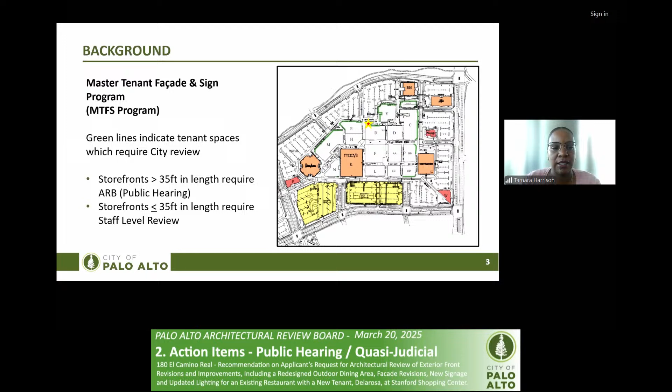The project is located within the Stanford Shopping Center off of Sand Hill Road, and it seeks to change the existing facade to accommodate a new tenant restaurant, Delarosa, and also proposes new signage for the restaurant. The project won't change the floor area ratio of the shopping center or the lot coverage, nor does it propose to change the use of the tenant space, but it will update the facade improvements.

Improvements include cleaning and repairing the existing roof screen, patching, prepping, and painting existing stucco, use of new perforated metal panels, and illuminated signage. There will be metal cladding on an existing awning, on a new awning with a wood underside, and blade signs. There will be new wall tiles and base tiles. The entry doors will receive a new wood treatment, and also some new wall sconce lighting. The facade has been determined to be consistent with the master program and with the center's character.

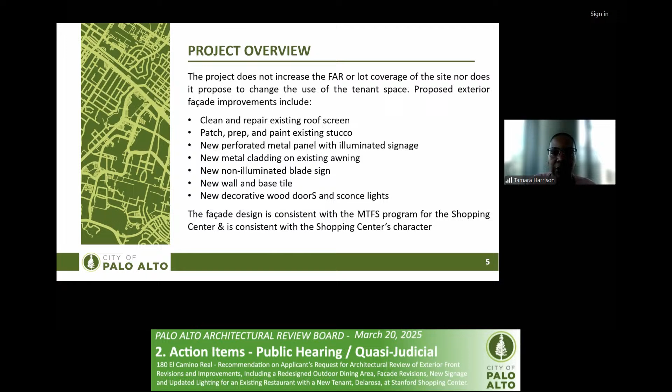On the colors and materials, you can see some of the finishes here. We have the perforated aluminum panels, which will go on two sides of the facade, the western facade facing the parking lot and the northern facade. The patio areas will be treated with planter boxes and umbrellas. The wood will go on the underside of the canopy and at the entry doors. The wall tiles are gray-toned hex tiles that will go on various portions of the facade, as well as base tiles also gray in color. Accent lighting will include orange wall sconces as well as white wall sconces.

As far as signage goes, the master program allows for one primary wall sign, one secondary wall sign, and one blade sign typically for all tenants. However, at the center, we have been allowing corner tenants to have two blade signs, given the fact that the center is a pedestrian center, and the purpose of those blade signs is to notify pedestrians walking through the center of upcoming tenant spaces. Delarosa proposes 4 signs in total: a wall sign on the primary facade, a wall sign on the secondary facade, a blade sign on the primary facade, and one blade sign on the secondary facade. All of the proposed signage has been found consistent with the Palo Alto Municipal Code, section 16.20, as well as consistency with the master program for the center.

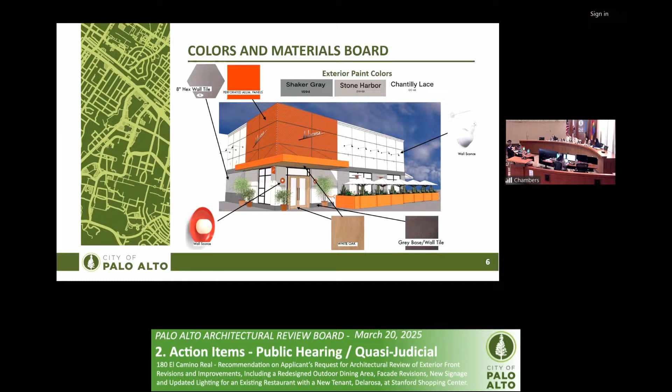This concludes staff's presentation, and I'm available for any questions. Thank you so much, Ms. Harrison. At this time, we open this up to questions for staff, so if we have any limited questions, now is the time to ask.

I just wanted to confirm if all the signs are in conformance, there's no questions there, correct? That is correct. And then do we have any restrictions or regulations on colors specifically in Stanford Shopping Center?

Or is it just allowed to be whatever is needed for the project or the applicants? I think there's some language limiting brighter or less common colors to more accent features, and you'll see that throughout the center, even on this edge. We previously had Yucca de Lac with orange colored curtains, which will now be Sushi Roku with red signage. Further down that corridor, the Melt has bright orange accent colors—they're in the middle of a redesign but will maintain their bright orange signage. And currently the CPK kitchen had use of lime green colors and accent features and things like that.

Okay, great. And then is there any restrictions on LRV, the light reflectance value of a white color—do we have anything for Stanford Shopping Center about something being too bright white? I do not believe that's in the master program.

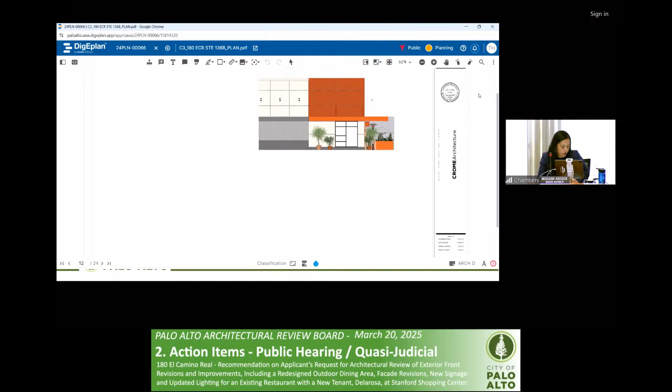A4.1. There we go, so actually this is a good place to look at it. The photograph shows on the left corner, shows the existing canopy stops right at the door. And on the rendering on the right, the canopy extends all the way to where your tile starts on the left.

Is that intentional? That is intentional, we wanted to line it up. We wanted to make that front corner proud, almost like an obvious statement, and we have the perforated orange metal above, and we wanted to line it up with that, the end of that, which also falls with a transition in the wall finish.

So would that require replacement of the whole canopy to extend, double the distance on one side? Yeah, to be honest, I don't know yet. That is up to the structural engineer, and we just haven't been allowed to take a close enough look yet to determine that because it's still occupied by CPK.

So ideally, we would just add another section and then we would clad the whole face, and the section would be welded and then supported from another rod from above. But it's still yet to be confirmed that that's possible. Okay, thank you.

So on that very issue, again, the supports - you're not showing any way in which the cable is connected through the new metal cladding at the top. Is it going to be interrupted in some way, or is this a detail that you're going to be working on?

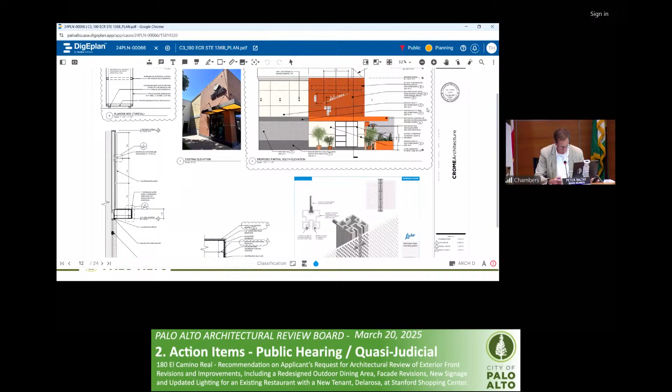On the right-hand side, the canopy is not showing as going the full width of the orange panels above. You're showing a gray piece of fascia trim tying into the rest of the building. That's not existing now - is the intention to add another piece of trim horizontally? Yes, so that it would be similar all the way around.

Is there any detail of how that would be done, or is that still to be determined? That's to be determined as well. Okay, thank you for answering the question.

Have you thought about the drainage at the top of your canopy? Where is that? Can you take that inside the building? That's a good question.

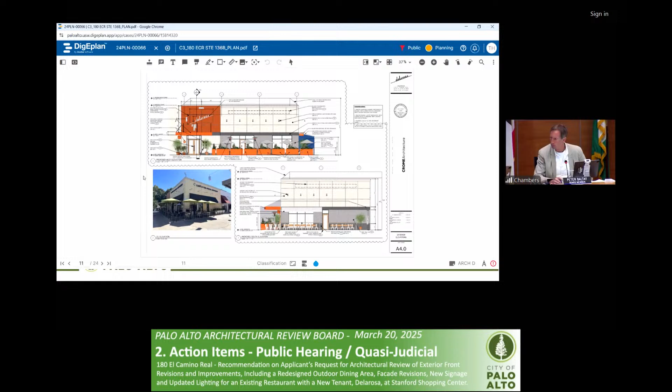Why don't you continue the awning at the front the full width of the orange panel above it? You're showing it stopping, say, 4 or 6 feet before the end of the orange part of the building, that projects forward 6 inches or so on the facade. But that shape lines up with what's happening below, right? Are you talking about that? Yeah, so there's some relationship there that they've created with the seating area.

Possibly, but the facade has got an awkward break. They're having to create - well, I'm asking the question of the architect: why did you choose to leave it this way? It was respecting the seating layout.

Okay, thank you. So the drainage - you haven't really worked out the drainage for the canopy yet, huh? Is that correct? Yeah, that's an interesting topic, and we actually received building department comments on that.

So the existing CPK awning structure is just sloped to drain onto the mall common area walkway. There was a plan check comment that came through that awnings are not allowed to drain onto the public right of way, but this is mall common private area. I don't see that to apply, so we were planning to leverage the same drainage that is existing.

Okay, good luck there. And then you'll detail the top of the canopy to the point where it does slope to drain, I guess. Yes, absolutely. Okay. Can you explain how you're going to provide heating under those awnings for the seating?

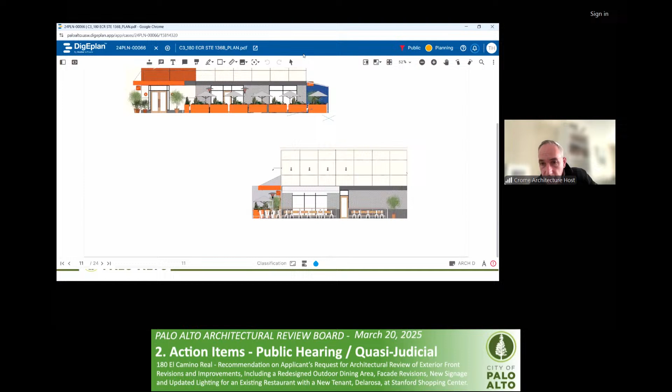What drawing number is that? I was looking at the photos of CPK. It's kind of hard to see here, but maybe on A4.2, if you go to the bottom left, you could see that they have their existing gas heaters just under the umbrellas there.

And so there's numerous that are actually in the area of easement, so we'll be relocating those.

It seems to me that it would be really nice to be able to do a canopy, the umbrellas with some kind of heater within them, but maybe they can't make something like that.

We actually proposed a canopy all the way around for the whole patio, but then we had to remove it because there's a 20-foot easement for the utility room on the front elevation. So then we proposed a canopy that could be disassembled for that 20-foot easement. And then the building department came back with a requirement that there had to be 20 feet in between us, the outside of our patio, and the patio for Sushi Roku. That didn't allow us enough seating underneath that canopy. And they didn't have enough parking because then it became considered covered space where we had to do a new parking calculation and there wasn't enough parking. So we spent almost 8 months redesigning, and unfortunately had to just remove it altogether.

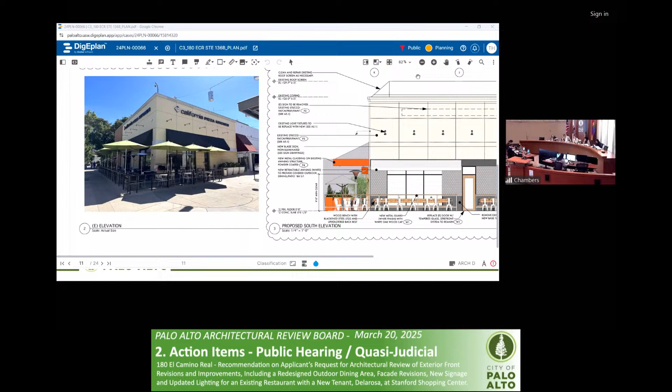Understood, you ran out of time. Yeah, time and too many regulations. So unfortunately, everybody has to abide to their code.

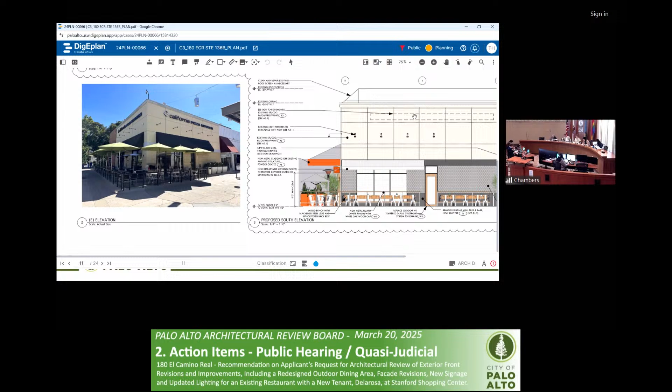Had a couple of questions on the planter and railings. How tall is the planter box? It seems like they have different heights from the railing next to it. I feel like that was documented in the application. I think we were at 42 or 44. For the railing or for the planter box? I will have to pull up the plans here.

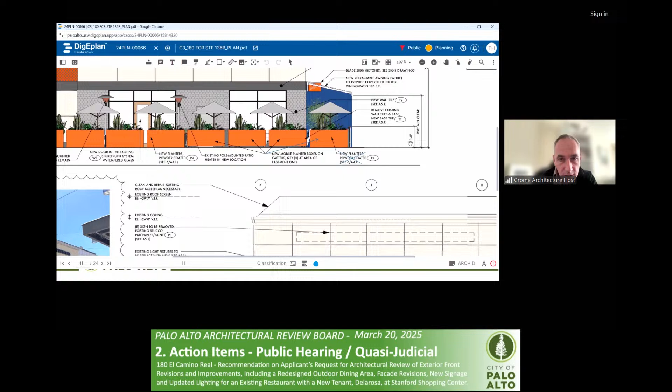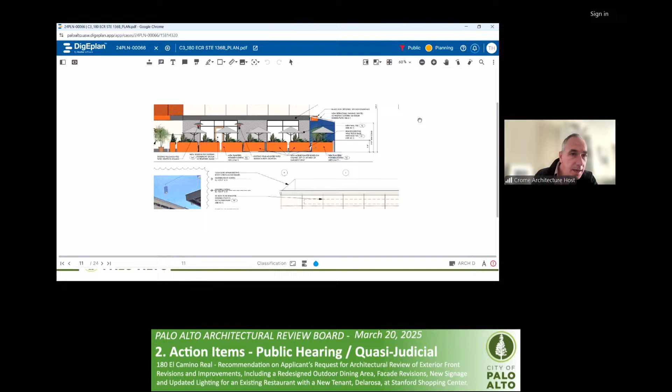On A4.0, you show 44 for the railing, and maybe 42 for the planter boxes. Okay, so that's not decided yet, well, then I can see. On A4.0, I'm seeing a dimension to the guardrail at 3'8". And I believe we provided a planter box detail on sheet A4.1. We had it 3 feet tall. So a difference of 8 inches.

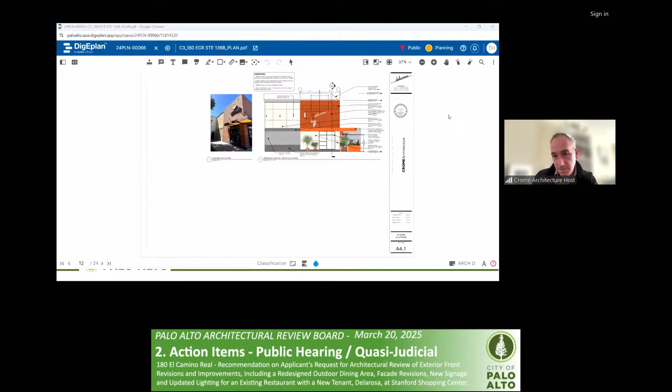Apologies that my screen is loading so slow.

On A4.0, on the right-hand corner, you have there's a sort of a blue something or other in the background. It doesn't really exist, does it? Is it a possibility? I'm sorry, that's just a limitation of the rendering software used. It was just like the sky beyond. I see. But the question was, that's kind of hanging out there, that piece of the seating. Is it possible to do something like almost what's shown on the drawing there to provide some kind of enclosure, or is that not allowed?

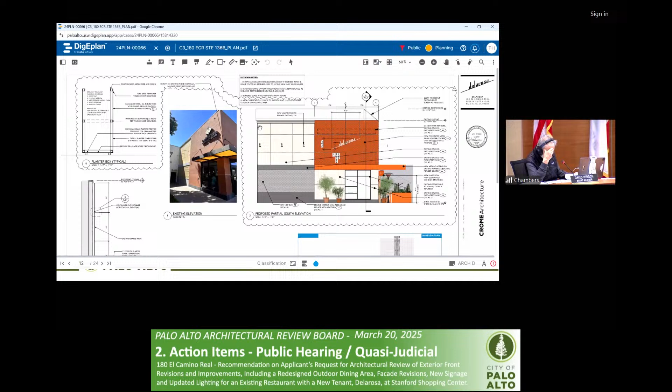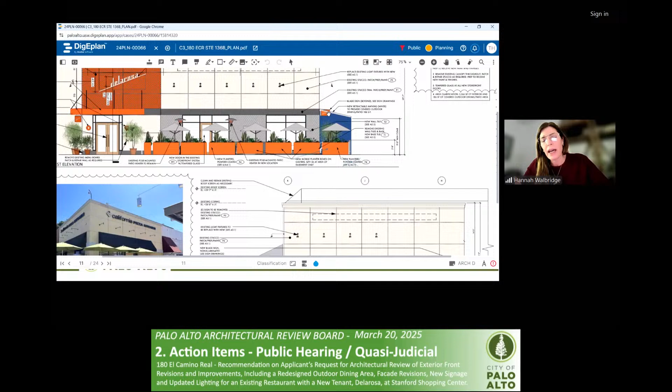There will be seating down the mall walkway there, yes. Is that the question? Are you talking about the awning itself, correct? Well, I'm saying that's a retractable awning that covers a certain length, I'm forgetting the exact footage of that side elevation. And that was our solution because that was the last amount of square footage allowed to be covered. So we did a retractable awning that would start at the corner of that elevation and go down the side that enters the mall, and come out the distance of the width of the patio.

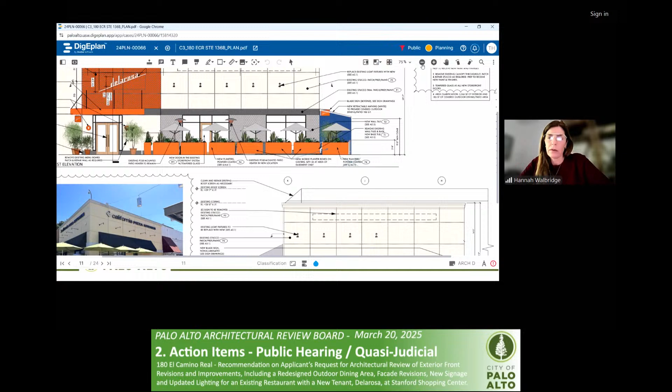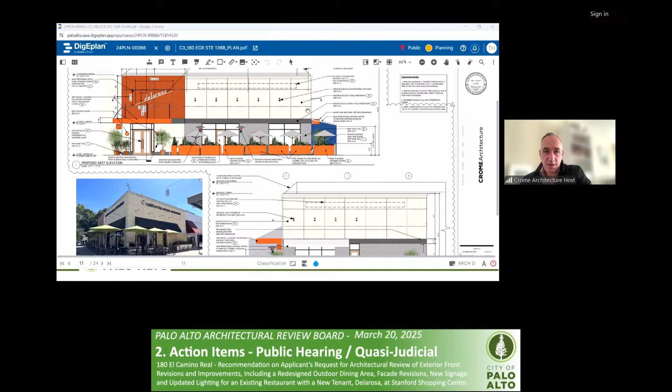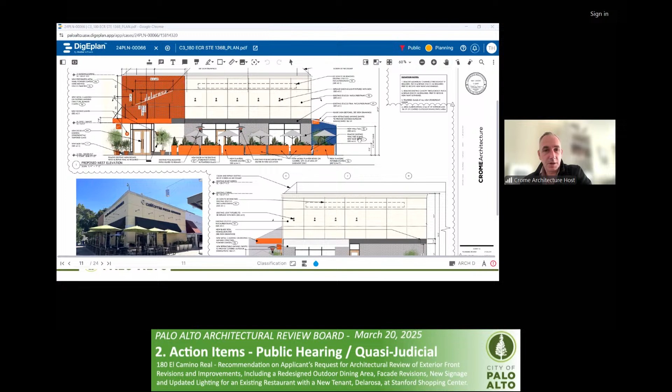I think this is the concept we've been struggling with. We've tried numerous attempts to provide kind of an enclosed private seating area, but the limitations of the clearances and the covered square footages just don't allow for a more permanent private kind of dining setting at that side.

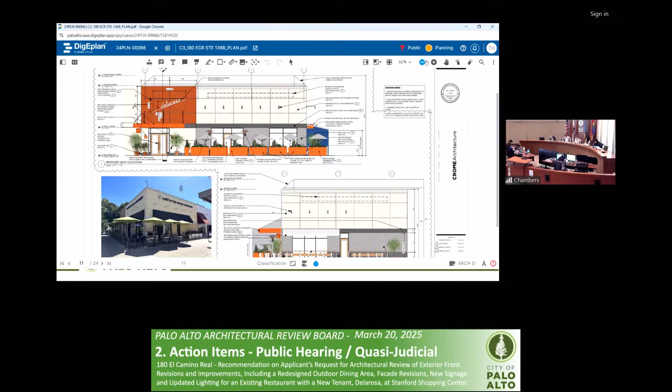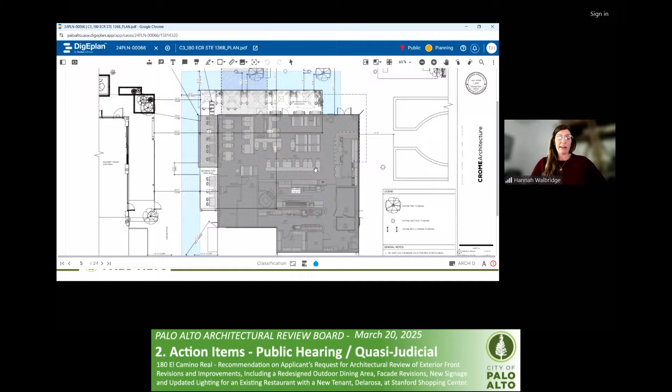I believe the existing CPK seating is not in compliance with the 20-foot clear. So it's tighter than what is presently there? Correct, the current CPK footprint sticks out 2 feet past the 20-foot clearance. So when we took the space over and started designing, we figured we had that footprint, and we designed a whole enclosed pergola and awning structure all the way around. But then with the comments and going back and forth, we really tried to convince them to allow us the variance, but we didn't win that debate. Oh, dear.

The applicant's team was indicating they were running up against some egress issues required by the building department, so they had to redesign here and leave this open to maintain the 20-foot free and clear from the Sushi Roku space.

As you can see, the seating then becomes really tight to get tables and servers in there. We could put a canvas drop down at that end to enclose it. I think that would be a big improvement if you could.

We have that in several of our locations, just to create more protection and make it more of a comfortable seat, hold the heat in, keep out the people. It just makes it more of an intimate space. Yes, it does.

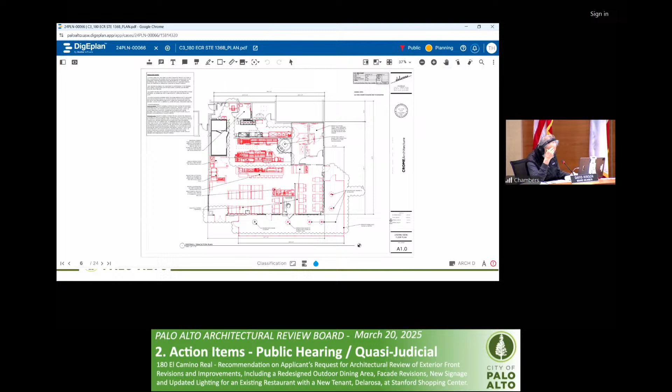To continue that kind of discussion, you have the metal railing on the outside of that area. What is there now - is that going to be what you're going to have, the presently existing metal railing? No, this would be a new metal, sleek modern metal, powder coated white with a white oak cap, as rendered.

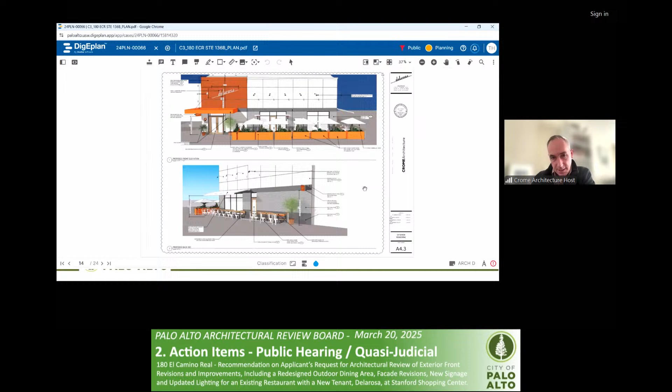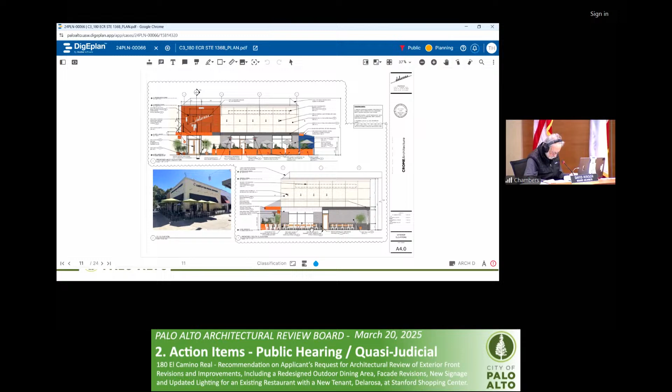Best seen on A4.0, elevation number 3. Just a point of discussion here - maybe it would be possible to continue the fabric enclosure, since it has to remain as thin as possible, and incorporate that into the face of the railing, so there's some closure to the outside and more privacy to people who pass on the outside.

I see what you're saying, yes. The problem is we only have the overhang canvas for a portion of that elevation. Well, I'm talking about at least up to the railing height there, to continue and provide some enclosure there.

And that's a way to hold it down too, in the wind. We can create an attachment either to the ground, or sometimes we'll do it to a planter box or to a railing, and then create a clip that kind of holds it taut.

Good, okay. Just a suggestion of an area that I would have questioned as a design question in the first place, but we seem to be discussing it, so I thought I'd ask. We can cantilever a panel off that's the width of the patio.

Question though - in that area you have a rope guard on a removable stanchion post. Is that where you're asking for something in this direction, or closing in the front, just sort of the face of that railing somehow, attaching something that solidifies the sense of that return. Maybe if they're choosing a color, the same as the end panel, I think that's possible as well.

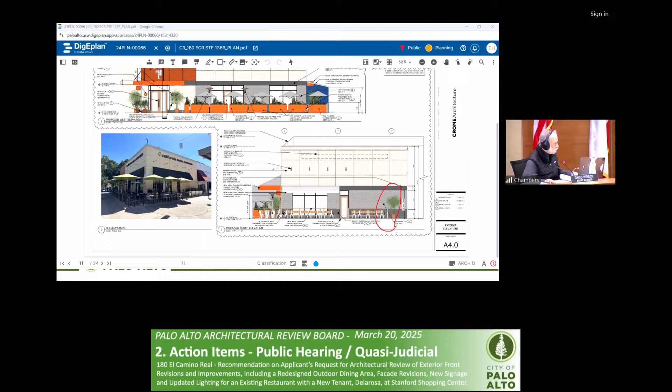Because I don't know where that rope actually is being used. Oh, you're saying it's being used to raise the awnings? No, the rope is - if you go to A4.3 it shows it in that angled view. Right here, there's a removable stanchion with a rope guard.

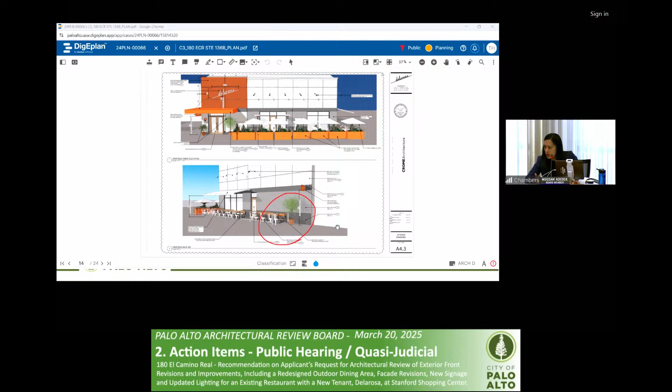That seems like an unfortunate way to end the patio area. I don't know if it needs to be removable for exit or something, but that's kind of what you're talking about too, David? I'm kind of not seeing the rope here - can you zoom in?

Oh, I see what you mean. That does seem like an unfortunate... why couldn't everything just turn the corner? I don't know if the guardrail could turn the corner, or put one of your orange planter boxes there.

Well, the orange planter box is kind of going to be isolated down there. I would have preferred to see orange planter boxes all around that whole end, but I know we would have too - we had a beautiful pergola designed with planter boxes in it, we just don't have the width. This space is just not available, so I think you have to do the best you can to turn it.

Yeah, we completely agree. It was a beautiful structure. I mean, we designed it looking at the center as a whole and wanting to be able to compete with some of the other storefronts. It's beautiful. Unfortunately, it's across from one of our award-winning projects that is very solid and turns the corner in a great way.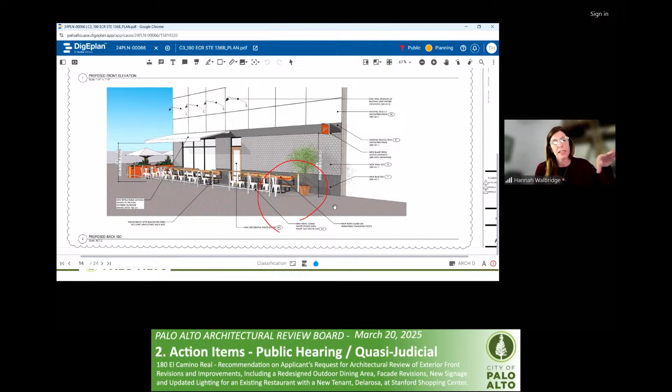So yes, it would be. Yeah, we watched it being built, and that's why we designed the pergola that we did, with waterfalling wood slats, built-in benches with planter boxes in them. I mean, it's beautiful. But unfortunately, we've got stripped down.

Yeah, okay, so they opened first. They won. They got their patios done. They can't take 2 feet out of their patio. So, but otherwise, I'm sure we would always want to have something that didn't detract from the quality across the way.

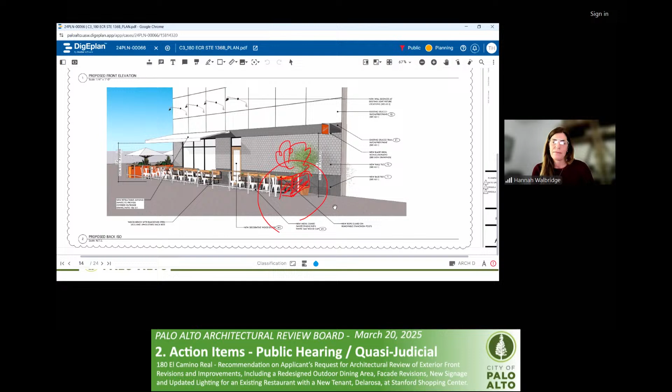Yeah, I think it'd be nice to bookend this a little bit more substantially.

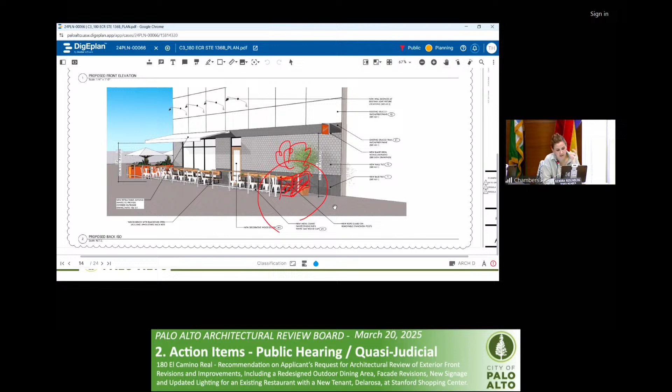Board Member Adcock has sketched on the screen here, and I fully support that. I think it's also a nice way to bring back that orange color, get that pop of color, helping with wayfinding. So when people are walking up and down, they see that pop of orange and they know exactly where they're headed. Good point.

I have further questions about this whole issue, but I think Board Member Chen was in the middle of asking questions, so maybe you should finish first. Oh, okay. Well,

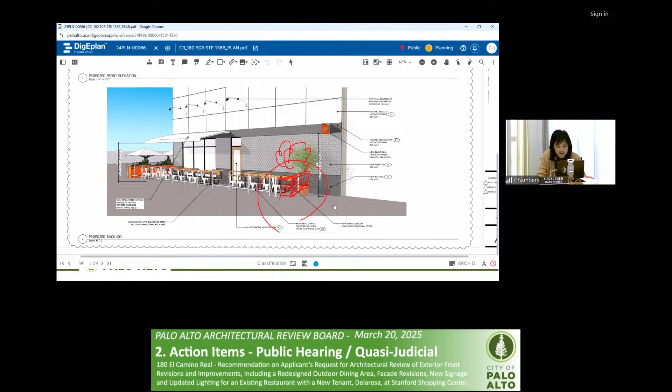Actually, it covered my second question. I was looking for where the rope is, but now I find it out. Okay.

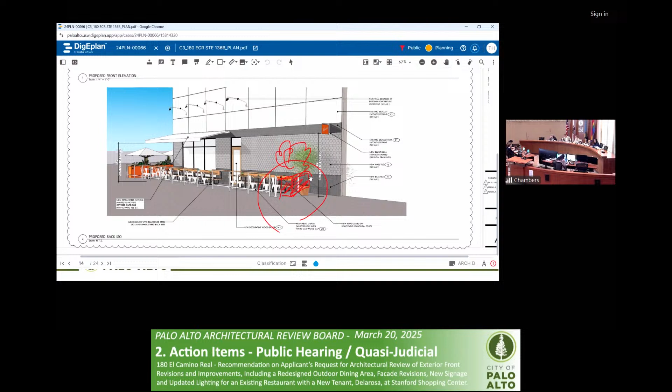So I would like to ask staff to explain, please, what the business is about this 20-foot easement where they need to remove these planters every day. Secondarily, what is this 20-foot clear aisle requirement? That's a new one to me on the shopping center. Where did that come from? And thirdly, we do have a requirement that sidewalks maintain an 8-foot clear travel width. What I'm seeing is that we're allowing light poles and trees to project into that. Again, please explain the logic behind saying that this is compliant.

Yes, so I'll take your first question. The 20-foot easement area is approximately located right in here, and this was a requirement that came from the city's utilities team. There's some utilities and a utility room, I believe, in this area that needs to be kept free and clear. So the planters located at the patio area here are on rollers or casters that can be moved per the utilities team's instructions.

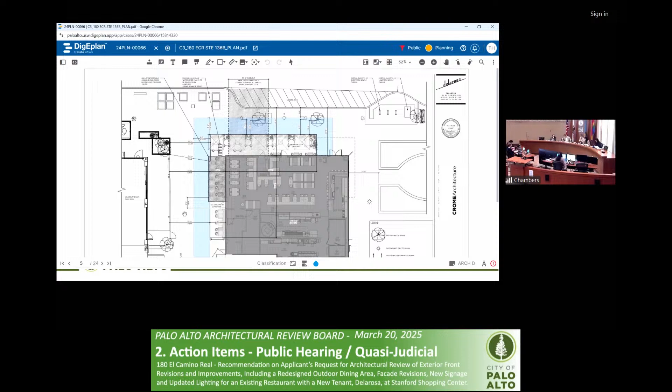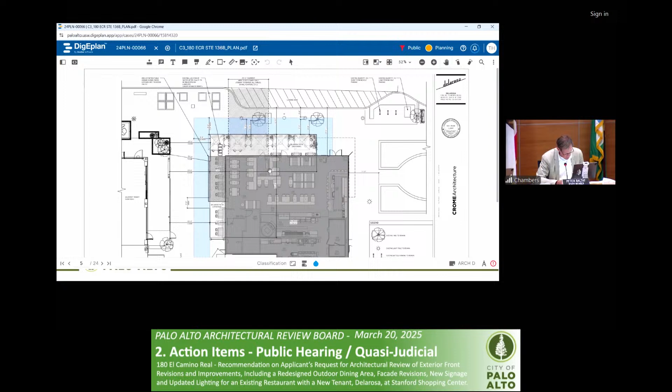The mall egress of 20 feet. Hold on, Tamara, excuse me, please. I want to understand more of the utilities. What I'm seeing on the building plan is a small room facing the parking lot. That's the utility room, correct. And that room seems to be maybe 8 feet wide. And in front of that, they're asking for a 20-foot wide easement cleared every day. That doesn't seem to be done right now.

Yeah, I can't speak for what is occurring right now. I just know that the gas team—I believe it's a gas meter room, if the applicant's team can correct me if I'm wrong—but a gas meter room that the utilities team is requiring clearance for. And I see a street tree planted directly in front of this, in the middle, in this utility easement.

Yeah, correct. And like staff, is this easement some recorded thing that's a legally required easement, or is it really just a request by the utility division for access to their facilities? It's a significant impediment to the mall and to the tenants.

Good afternoon, this is Richard Wessels with Simon Property Group, if I may interject. Please. Thank you, Richard. Okay, again, Richard Wessels, spelling of the last name is Wessells. And I'm manager of tenant coordination with Simon Property Group.

The 20-foot easement that runs to the face of the building is a recorded document that is in the hands of the city attorney right now. That has been mandated as part of an overall easement plan for the shopping center. That was mandated because the city owns the gas line that runs up to the building, which sits within a 20-foot required easement—just in case there is ever a requirement to get into the ground for excavation, that 20-foot wide area be kept free and clear. And right now CPK has been in violation of that. So the easement requires daily clearance of the property, so no trucks.

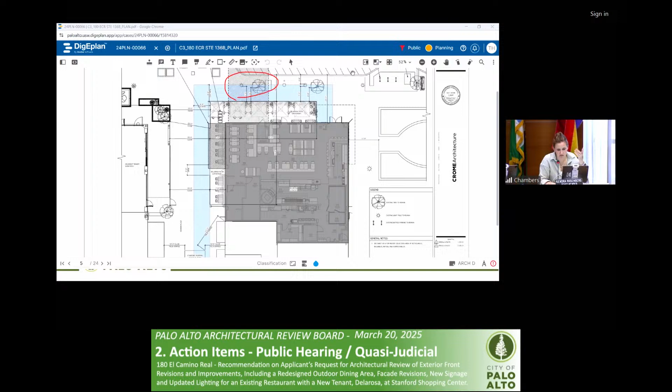I think that 8-foot is supposed to be clear, period, not aggregate. I think it's just supposed to be an 8-foot clearance. But again, it's one of those situations where I understand why the city is not forcing this to be an issue, and as the owners also, we would not want to start cutting down or relocating trees in the shopping center if we don't have to.

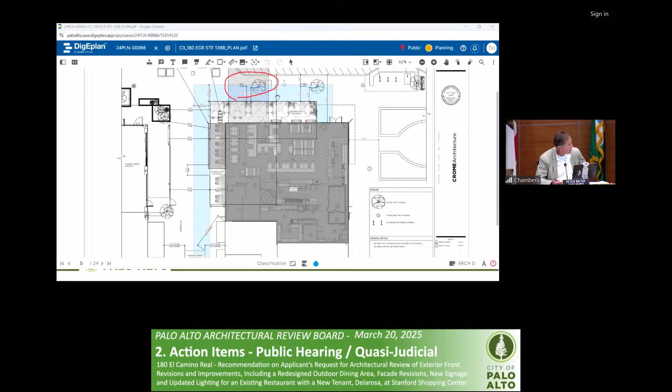So to put some context on this, as outdoor dining has become more popular, the architecture board established what I'd call an informal policy that we want an 8-foot clear path of travel between new added outdoor dining areas and the edge of obstruction, so you could have clear passageway for families, children and strollers, people in wheelchairs. In places this had gotten cut down quite a bit more, so we're trying to establish a clear guideline so applicants know what had to go on.

I'm quite sure at a recent project we decided that we should have some exception to allow projections into that for things like light poles, which are usually easy to navigate around. We had established, I think, a 12-inch projection allowance. Again, staff, I'm dismayed to hear that you folks don't even seem aware of that.

We've been through this so many times and we've done so many projects, and it helps the applicant so much just to know what the rules are.

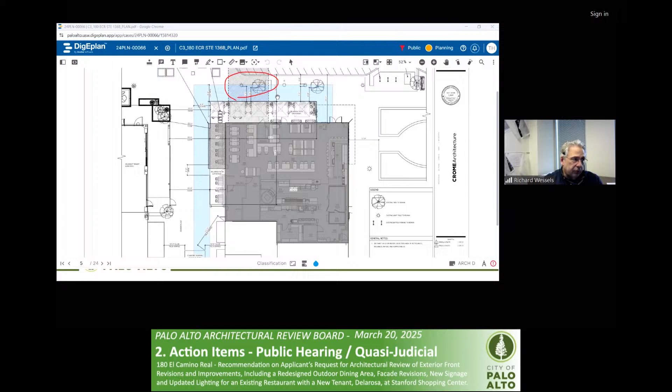Chairman, if I may, our discussions with that encroachment was on the Melt, which is the adjacent tenant one door down from Sushi Roku, where we moved the light poles out of the middle of the walkway to one foot from the curb line, which gave you your 8-foot clear. But with this particular location with CPK, where it exists, is to provide the council with the 8-foot clear. We would have to basically remove the trees and not plant them back in front of the building, because we couldn't move them out to the curb line since it encroaches into the drive lane. We really didn't want to lose the trees in front of the building or the shopping center.

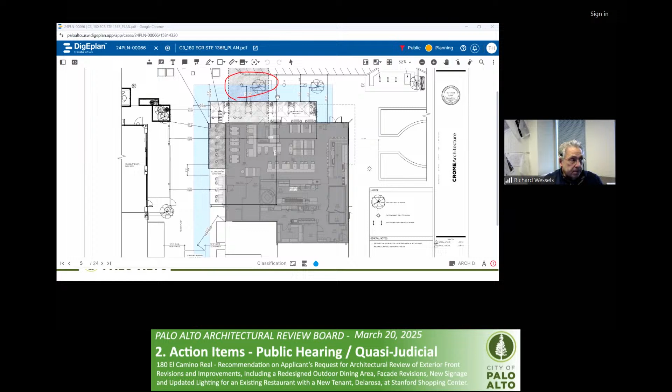Thanks for the clarification. I'll pick that up when we get past the questions section of our hearing.

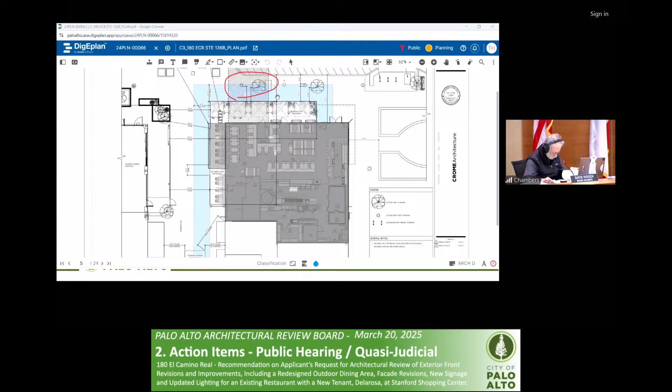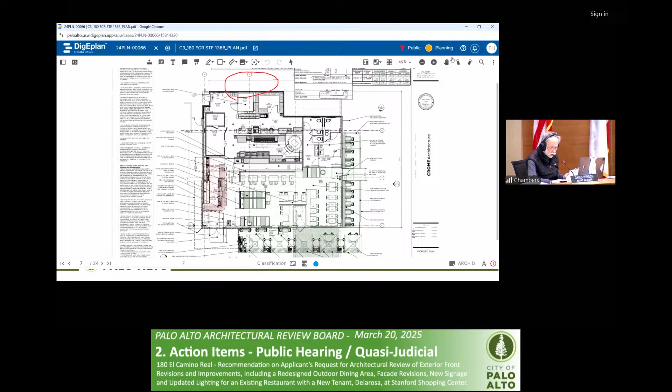I have a question about access to the outside dining. I guess is this a gate or whatever that is shown on A1.1? How do you get into the outside dining area? How do you choose if you're outside the restaurant to eat outside versus inside? Is there a flow of traffic to the inside door and then you go out, or where's the entry into that outside dining?

Hannah, please correct me if I'm wrong, but my understanding is that all patrons would come into the main entry door to be seated. So there's no gate there, it's a closed area on the outside. That is correct. So they would come in and the host would seat them and then lead them out through the side door.

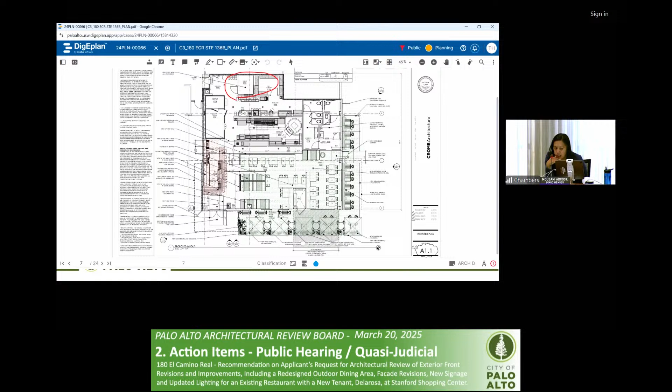I guess a follow-up question is why the rope stanchions are there on either end. Is that your egress path from the outdoor dining? Good point, you have one over there too. They aren't both needed for egress, and if they are not in favor, we're open to providing more permanent planter box structures.

I don't think that either one of them are required. But what would be your egress route then, if I'm seated here? Are you asking about the second one being all the way around the corner? Because there's a straight out egress passage from the door on the side of the building facing Roku. But the one in the front is the issue, right? They're next to the front door.

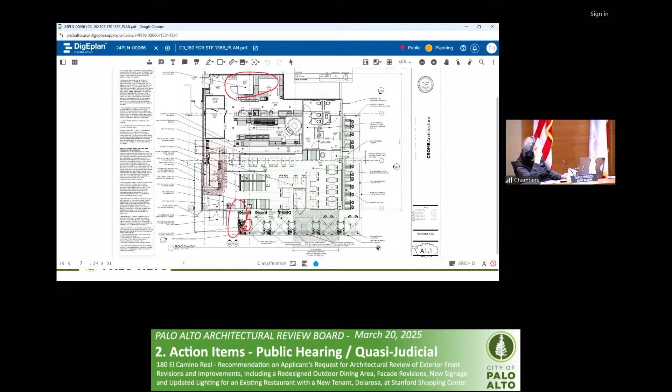I'm just wondering, for patrons seated here, would they have to go inside to exit? Yeah, good question. I mean, as it currently is, and if we were to build a more permanent structure, yes, it's an issue. I don't see it as an issue, but if you do, I understand. Yeah, I mean, we can create another exit.

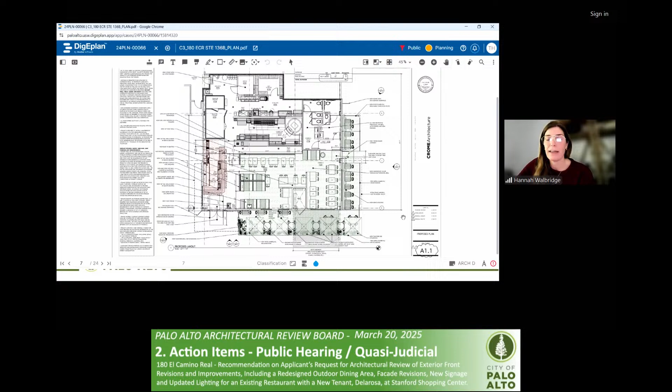This isn't quite our purview, but the building department's, but I just want to flag that. Yeah, I see what you're saying. It would be cleaner to have another exit for the patio. So it could be a gate.

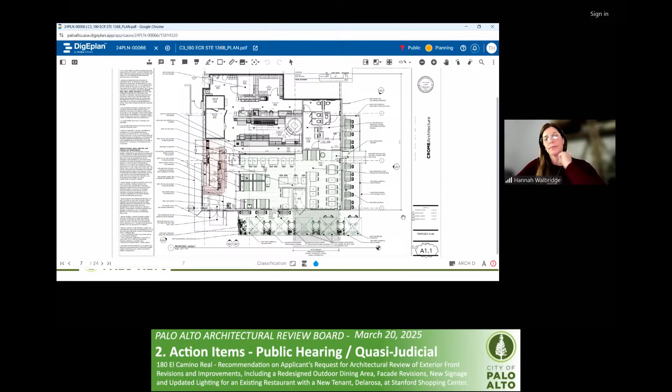Does anyone else have any other questions for the applicant? Okay, thank you very much. At that time, we will close the comments and close the questions portion, and we'll turn the discussion inward to the ARB panel. Who would like to start?

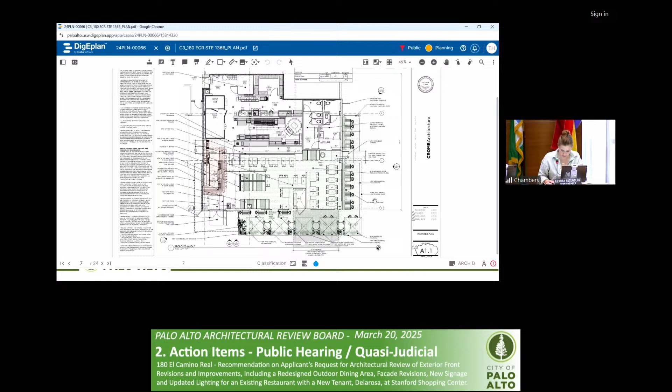I'm happy to jump in. I don't see many problems with this project as far as meeting our standards, and I want to see this get approved today, obviously. I think there's questions about that awning, how big it is, how the trim is around it, what the brackets are, and that could either be left to the applicant and staff or come back to us for an ad hoc committee review. It can go either way.

I guess my instinct is that these folks seem to have been run through the ringer enough. We should let them sail on. This is a small thing, and I'm sure they're going to do this reasonably well, but what's documented here isn't quite right. Regarding all the site planning, they seem to have come to a solution they can live with, but I'm going to express strong disappointment with staff and with the applicant for not working harder. These regulations you're being held to are not entirely the whole story, and there's more you could do. But I understand you want to get this done, so run with it.

But it's just not right what's going on with them right now. This is not the best solution for the shopping center, for the town. This is not a fully correct interpretation of all the codes, both easements, clearances, the whole package. So that's what I see from this point of view. Thank you.

Thank you, Peter. I'd like to see this moving forward as well. I don't have any major objections. I do find two things that could potentially come back for ad hoc, but I'd be open to the other board members' consideration on that. One is the support system for the canopy, and number two is the egress and finalization of the patio perimeter.

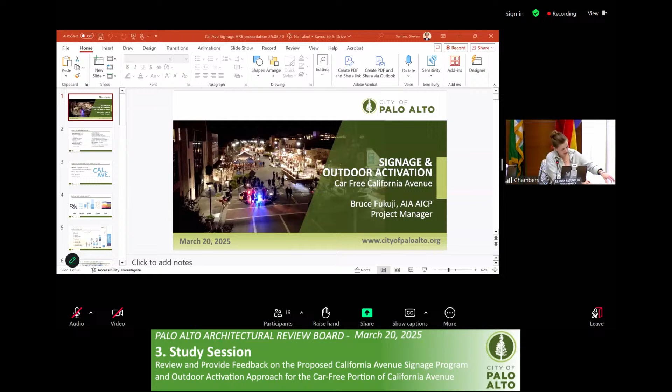For study session item number 3, the title is Review and Provide Feedback on the Proposed California Avenue Signage Program and Outdoor Activation Approach for the car-free portion of California Avenue. Recommendation by staff is to provide feedback on the place identity elements of the proposed signage program, review and comment on the wayfinding system, including sign types, locations, and concepts for California Avenue, and review and comment on the outdoor activation zones, setbacks, and street space allocation map.

And with that, I will hand it over to Bruce. Hi, good morning, Bruce Fukuji. I'm with the city manager's office, and I'm managing the planning for the California Avenue car-free streets.

Great, so good morning, really a pleasure to be here. It's been quite a journey in the development of the work on California Avenue. I thought it would be helpful to touch base on the engagement that's happened to date. The starting place really was the council action in November 2023, when they approved the contract for Urban Field Studio to do the work for the visioning for the Cal Avenue car-free streets planning. Part of that scope of work is to look at outdoor dining guidelines, which we're now calling outdoor activation, and also signage and branding.

So in thinking about what was needed for that work, we got started in earnest in February of last year, and we were having monthly meetings with the Cal Avenue merchants. In that process, we went through and did a whole series of visual preferences to find out signage issues and needs, and walked the site, met with many business owners just to look at what the needs and issues are for signage.

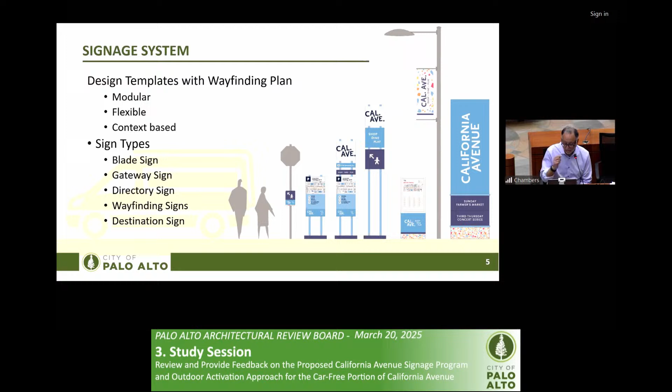On the wayfinding, one of the first issues that came up in working with the merchants is a frustration that with the temporary closure of California Avenue, people didn't really know how to arrive at Cal Avenue, how to get to parking, and then from parking, how to get to the car-free part of the street. We got an encroachment permit with Caltrans and did temporary signage, which is out there now.

The main thing we were looking at is helping people know that there's parking access on Sherman and Cambridge. We're completing the encroachment permit process with Caltrans now to complete improvements at the California Avenue intersection. Right now the signal's been changed and there are new crosswalks in place, and there'll be additional signage about no left turn southbound. I think all those things will help, but the orange signs out there now really help direct people to Cambridge and Sherman to get to parking. That addressed the first issue the merchants had.

The next issue was place identity. When you come to California Avenue, how do you say, I'm here, and what is it? You see that in San Pedro Square in San Jose, for example. There are a lot of places that have done significant monument signs to help identify a commercial district. So there was a desire to do that, and to figure out how.

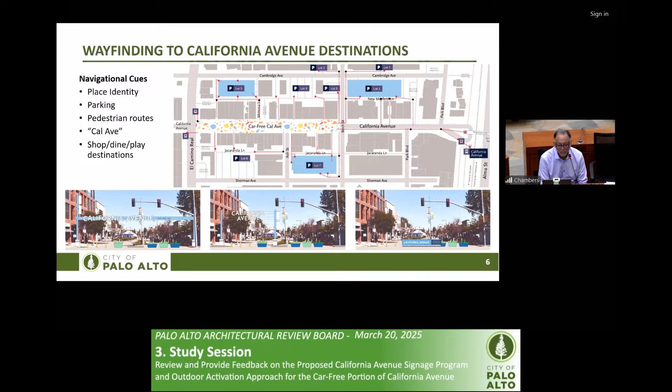So these next few slides are about outdoor activation. I think what's really special about California Avenue and its closure as a car-free street is that you don't have the anxiety, tension, burden, and vigilance that you need to have when you're in a street environment with cars. You're not going to have the noise, the air pollution, the clutter—you're just not going to have the presence of all those things. And that's clearly going to be a much more attractive environment to be in. And there'll be no parking.

One of the first things that needs to happen on that street is the resurfacing of the paved asphalt part of the street to remove all of the traffic markings, the lane markings, the bus only lane, the right turn lane—to remove all those things, including all the marks for parking. And so once you do that...

You don't have the frame of reference that you have like on University Avenue for a parklet program. There's no need to use parking and the shape of parking to constrain how you do outdoor activation. At the same time, because it's a completely open environment, we had to rethink how you organize the street to create zones for outdoor dining or outdoor activation, so that as a business district, as a commercial destination, you can really leverage and maximize the opportunities for commercial use of the public right-of-way, the street and the sidewalk.

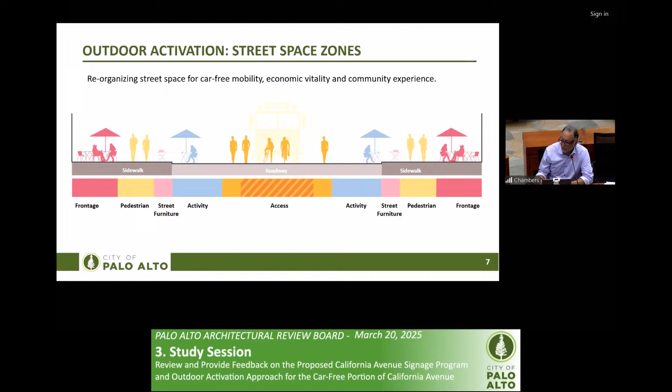This would be true whether it's the existing street with large sidewalks of varying depth, or whether you adapt the street and modify some of the roadway or sidewalks to create level zones, or whether you reimagine the street to have a continuous pedestrian environment at the same level across the street. So, in thinking about how you divide up the street, we had to take a different look at it.

There's 30 buildings on California Avenue from Birch to El Camino. We realized we need to think about setbacks based on building needs, fire, life safety, and emergency egress needs. So for any one building, we're looking at how to reserve those spaces and zones, 8 feet, also allowing pedestrians walking down the access zone to reach other buildings without a continuous environment obstructing them. So it increases and maintains accessibility to all the different uses.

We're doing that, and with direction from council about having outdoor dining establishments focused on the frontage of their establishment, we're looking at the limitations around that, but also how these activity zones can be used for multiple things.

One important thing in designing the street is supporting the Sunday Farmers Market, which has about 80 stalls there now. Talking with Andrea, they see it as the most diverse, highest quality farmers market in Northern California, and they really like that. A lot of people are interested in being a vendor here.

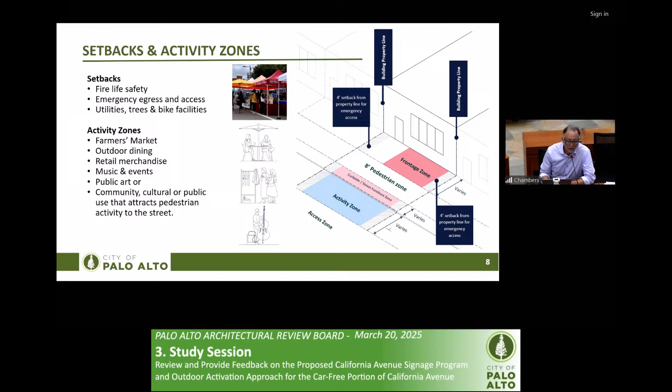We're doing what we can, looking at how to balance that out. The activity zone is an area where the farmers market can be used, so there's a lot of different things that can take place in that zone.

Next slide. When we look at the layout, this is foundational to the vision of the street. The existing condition really just has the emergency access setback, which is respected pretty much with business owners, but outdoor dining extends however far a business wants based on their informal way of setting it up, or agreements with retailers, their business, or the building owner.

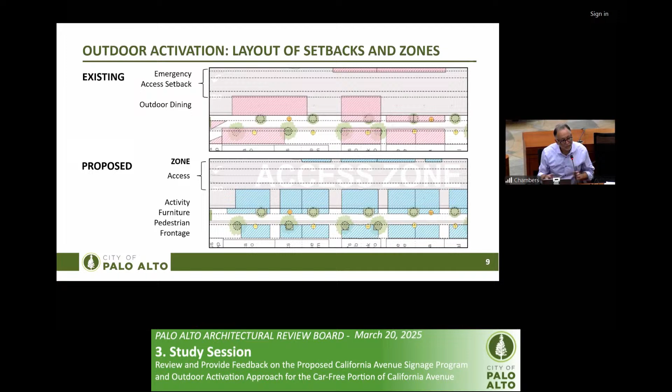It extends in a lot of different ways. What we're looking at now is how to create access zones, activity zones, furniture and pedestrian frontage zones, and setbacks based on building access needs and tenancy. This is how we're going to restructure this, and it would apply whether adapting the existing street or reimagining and reconfiguring it, so you'd have a continuous pedestrian environment either way.

I'm not going to go through this block by block and building by building, but we can answer any questions. We've shared this with the merchants—we had a meeting with them just the other week and went through all this. About two weeks ago we started having individual meetings with property owners and merchants to get their feedback and see what their interests, needs, and concerns are.

What happens is that in some locations it's very apparent the existing curb, sidewalk, and planter configuration designed for automobiles completely does not meet the needs for outdoor dining and activation. In adapting the street, between these two alternatives—adapting versus reimagining—we're identifying where those areas are and what improvements might be needed to support outdoor activation as an early action. So we're in process with that.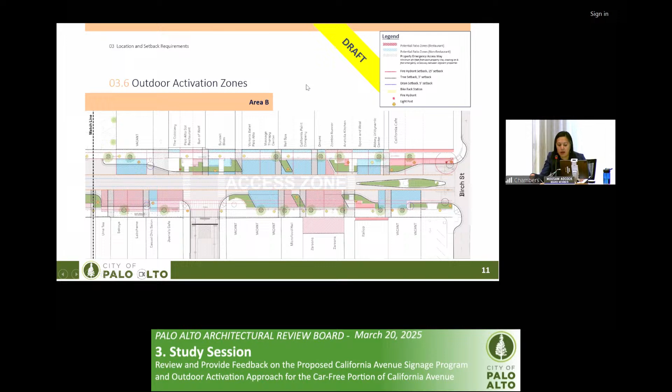One last question is about lighting, because right now it's lit up in a way that you would light roadways, whereas pedestrian walkways have smaller scale lighting. And right now for the restaurants, the lighting's kind of on them, right? So individual outdoor dining areas are lit up differently. Is there a plan, another layer to this, that also addresses a cohesive lighting plan?

Yeah, that is a big opportunity to think about how to redo the lighting on that street, and we're starting to explore that. I think the output of this effort is kind of a combination of vision with preliminary costs in it. So it's not going to be a complete redesign of the street - this is like an urban design planning exercise.

So it's about setting intentions around those things. We don't have anyone on board who would be able to figure out how to design all the lighting for the street, but being able to set the intention on creating a pedestrian-lighted environment would be great. So I think it's definitely part of what we're looking at.

Yeah, I think it's great to hear from all of you about things you think should be incorporated, or helpful elements or opportunities that should be considered in thinking about this. Yeah, thank you - even if it's at a master plan level that gets incorporated over time. Thank you.

I have a couple of questions on the gateway signs. For the three options, it seems like they are all in different sizes, especially the third one, which is much smaller compared to the other two. Is there any restriction on the width of the third option? There's no restrictions on any of them.

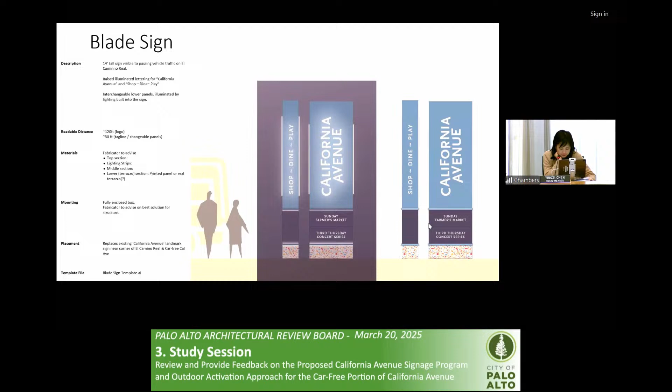Another question is on packet page 102, about the placement of wayfinding signs. There are different symbols for different types of signs. I don't know if we put that in the appendix. We have to see. I don't think it's in the appendix.

My question is for the directory cabinet, there are 4 green boxes, green squares there. One is bigger and the other 3 are smaller. Do they indicate different sizes or are they still the same size? I think they're all the same size. So there will be 4 directory cabinets in total along the street. Yeah, that's the initial proposal for that.

Following up on board member Adcock's comment for the replacement of the tenant name, have you considered using the digital screen? Yes, that's been brought up several times for being able to do that, and that absolutely could be a choice to explore.

Another question is related to comments that Mousam mentioned about the terrazzo pattern. I know in the package you show an image of it. My question would be, what's the scale of the pattern? I know there is an image in the packet showing what the real terrazzo is and what the pattern is.

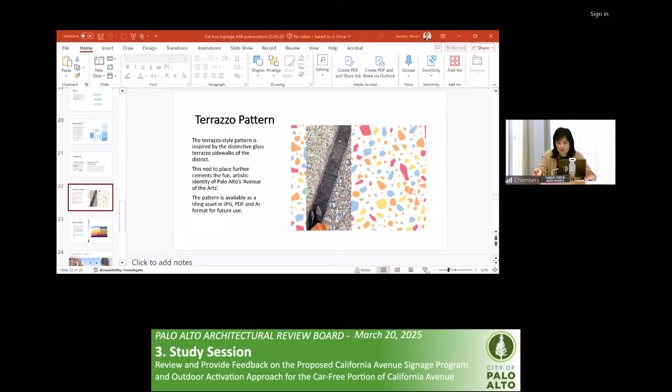What we had the consultant do is provide us with templates, and in the branding template there's a pattern template which can be scaled however big or small. There's no intentional grain for it. I think it depends on what it is and where you apply it. If you're doing a banner sign, it might be a little bigger because you see it from farther away. If you're working on the directory sign, it might be really small. There's no specification on that.

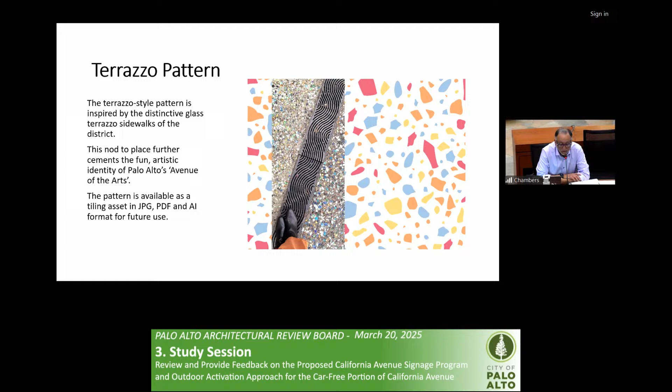Thank you, that's my question for now.

If we don't mind continuing down the line, I'd like to jump in here with a few questions. On packet page 101, looking at the many pedestrian paths, it shows the car-free Cal Avenue as having that terrazzo pattern on it. Is that actually the intention to paint that portion of the street, or to do some type of paving element to make it colorful?

Remember, that is a graphic design convention for a directory map. It's not a proposal for improvements on the street. That said, there are a lot of things about it that are very charming in thinking about having that on a street, so I think that's a real possibility.

When looking at the adaptive street concept, some of the things are, how do you designate what's pedestrian and what's bike? The way we're thinking about it is to not do green bike lanes, because that implies a standardized speed limit, but to think about how to color the pedestrian areas so that they're uniquely defined, and certainly patterns could be incorporated. They don't have to be the rigid things used in a lot of communities for defining pedestrian ways, like continental crosswalks. So if that's something you think is compelling, it's worth us exploring.

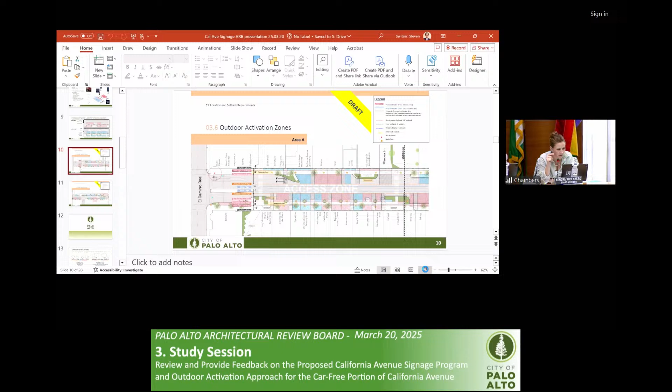If we can get there, I can show you what I'm talking about. Yeah, exactly this one, but the next one that shows Birch. Perfect, I'm going to draw on the screen here. So if that emergency egress is coming this way, can they turn out this direction, or would they have to come this way, or is there the possibility to go that way? It looks like this one's too tight, so I don't think that's the option here. So the question would be, how would that emergency egress vehicle get in and out on the other end?

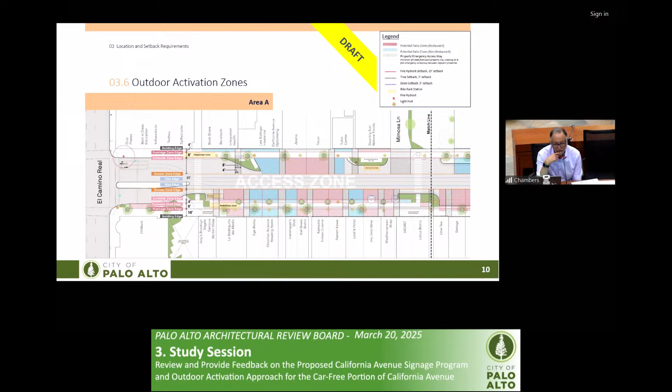All three intersections at Birch, Ash, and El Camino have retractable bollards that facilitate emergency egress in and out. So you would be able to drive in at El Camino, drive all the way down, and drive back out on Birch if you wanted to do that as an emergency vehicle, or you can do it the other way, or drive in on Ash. So yeah, all three locations have retractable bollards. Perfect. And then, if you don't mind, go back to the previous slide we were just looking at.

So my question is in regards to this blue space here, if that's covered with chairs and tables, in an emergency situation we obviously wouldn't have time to pull those in and out. My 2 cents would be that maybe that needs to be left open, where the bollards are, so there's constant emergency egress. This side is a little too narrow anyway. So this blue area is a little concerning to me because in an emergency situation we're not going to be folding up umbrellas and putting tables and chairs away.

On a similar note, in Los Angeles there's 3rd Street Promenade, which is what I was trying to think of on Tuesday. They have a nice loading and unloading zone. El Camino is very busy, so it's not really a good place for dropping off pedestrians. But if you go back to the Birch slide, there's a little inlet there, and maybe the bollards could still be there with emergency egress still intact, but there could be a meeting point, like if you have an Uber dropping you off, or a DoorDash situation - a temporary limited-time vehicle drop-off pickup area. Has that been considered at either of these points?

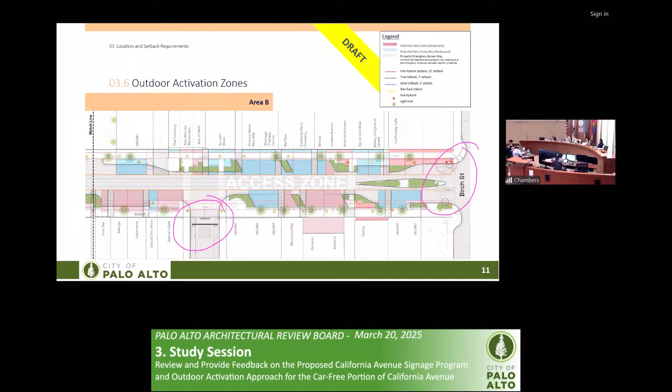Yeah, on Birch Street we're looking at that. So yeah, there's definitely a need for pickup, drop off, Uber, Lyft, and ADA parking.

So on Ash Street, I don't have that here as a slide in this presentation, but the configuration at Ash - along the line where the frontage of the buildings are, if you extend that imaginary line into the center of the street, there'll be 2 retractable bollards, and planters on either side of that. On the Ash Street side there'll be colored, clay-colored stamped asphalt like the existing crosswalks underneath. There are 2 ADA parking spaces - they're ADA pickup drop-off spaces, not actually parking spaces. They'll be drive-in, and there's a 16-foot fire zone that has to be clear, but that clear zone could be used for ADA access for people getting in and out of vans. So there'll be 2 ADA spaces at the end of the street.

Okay, great, thank you. I believe that's all my questions for now.

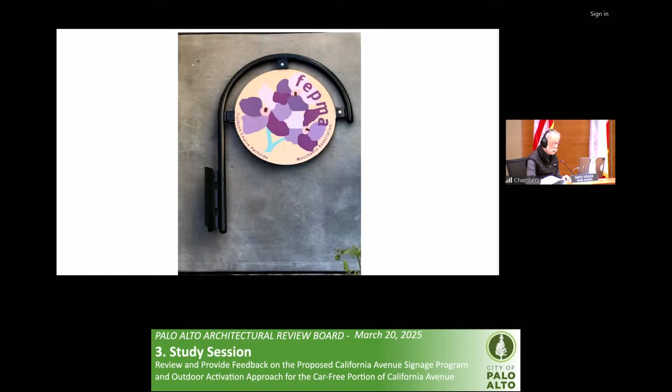So Veronica, could you put up the sign piece for me for a minute? Signage — what is signage? Let's wait until we get an image up here. See this sign here on a bracket? I want to show you what it looks like.

This is the kind of sign — it's got these tabs on it, right, and the tabs tie to the piece that you could attach to a pole. I show you this because it was a street improvement that was never done — we ran out of money. You've got that problem too.

But where should this side panel be? I think it should be inside of the line — you have a traffic line, you have the pedestrians, you have the other stuff on the side. You have a whole new line direction there. Why not use it, why not put the signs there? If you put a fabric connector attached to the light poles, it's actually over all of the activity. It's further in because it's at the curb — it presents the existing curb line.

It's not where your emphasis is here. It ought to be somehow linear. Folks, you should be thinking about this. There's a lot more to be done to this street because to make it really work, it needs more thinking still. You're only really starting on this.

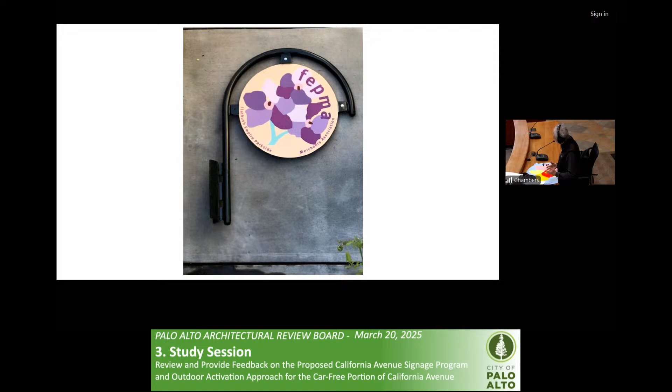Can't hear me? Can't hear me? Okay, sorry. Thank you, Stephen.

So I would say go with the graphics that you're working with there. I mean, to say the optimistic modern, although I sort of think if you put words to it, it's more like images than it is words.

Wayfinding, don't spend so much money on all of that. It's too much graphics.

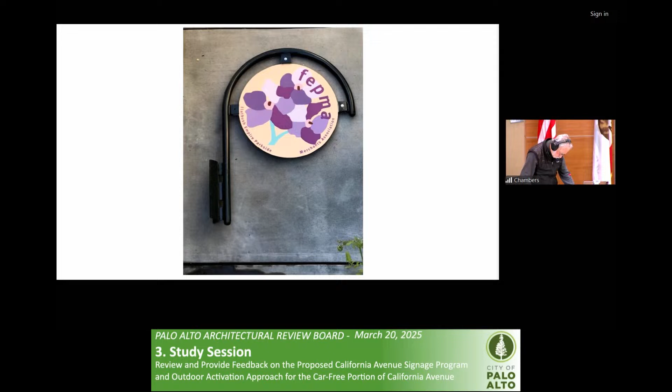So the tagline, if you turn to your page 67, it's a really important page and it almost has nothing on it. Let me see, page 67, let me get it to... Okay, shop, dine, play.

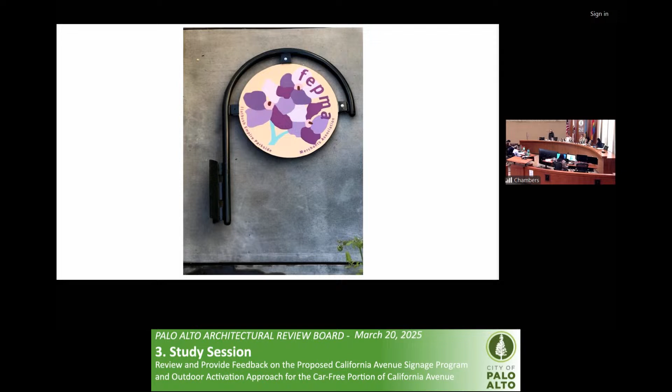I agree, shop, I agree, dine, but what's play? What is it? You want to say what it is? Yeah, we've been meeting at Gamelandia, and Barry is the owner of Gamelandia. We had this whole conversation about what to do, and there's a real interest in being able to play and spend time doing play things. So that's kind of where that came from.

Okay, so let me just make some other comments because could it be? And Peter referred to this a little bit. It could be listen, because it could be music. Could be watch, could be a performance. It could be relax, read a book. It could be dream, if you're kind of a poet and you want to go there and see what the culture is like, because there's an awful lot of culture on Cal Ave, really interesting kind of mix of all the food types that are there.

Could be exercise, you could have... you can see, what is it called, that you do these sort of... you know, that kind of exercise. It could be that sort of thing happening in the street because you could ask people to come down there. If you think this way, you make a marketplace. You get people there, then they're shopping. So you're thinking too limited in a way.